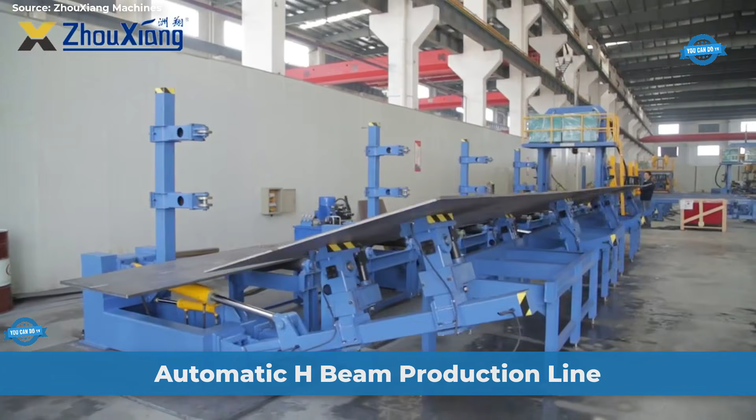The automatic H-beam production line is designed to optimize the manufacturing process of heavy steel structures, particularly focusing on H-shaped steel beams. By minimizing reliance on manual labor and traveling cranes, this production line maximizes efficiency and throughput. The process begins with cutting and laying off the raw materials to required specifications, ensuring precision and uniformity in size. Components are then assembled into T-beams, integral parts of the H-shaped steel structure.

Hydraulic mechanisms are employed to flip the assembled T-beams by 180 degrees, facilitating subsequent steps in the production process. The T-beams are then arranged and welded together to form the characteristic H-shape, the primary product of the production line. Another hydraulic overturning maneuver repositions the H-beam, preparing it for further processing. Automated shifting mechanisms transport the H-beam to the next station in the production line, ensuring a smooth flow of work.

Sequential welding of multiple seams ensures structural integrity and strength of the H-beam. Controlled by a chain mechanism, the H-beam is rotated at specific angles to facilitate welding and manipulation during the production process. Roller systems are utilized to feed the H-beam into position for various operations, ensuring precise alignment and movement. Hydraulic systems are employed to straighten any deformities or imperfections in the welded plates, ensuring quality and compliance with specifications.

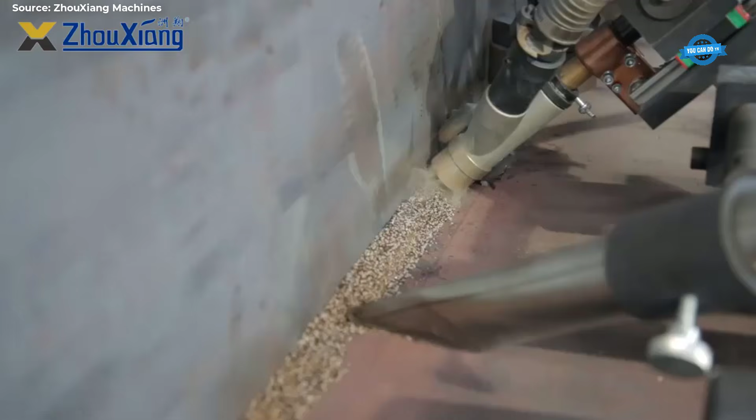Finally, the finished H-beam is conveyed out of the production line, ready for further processing or assembly into larger structures. Throughout the entire process, automation plays a key role, reducing the need for manual intervention and enhancing efficiency. Conveyor rollers, hydraulic mechanisms, and chain systems work in harmony to transport, manipulate, and assemble the steel components, resulting in a streamlined and optimized production line for H-shaped steel structures.

The TDRi aluminum boat welding system is a highly efficient and precise automated welding solution designed specifically for aluminum boat manufacturing. Here's how it works.

Offline programming: the system utilizes Robotic's offline programming software, allowing the welding program to be prepared in advance. This minimizes downtime in the welding cell when switching between products. The offline programming saves valuable time for the customer and enhances production efficiency by up to 50% compared to manual welding setups.

Seam finding and following: integrated with a seam finding and following camera system, the system accurately locates and follows the seam of the aluminum boat hull. This ensures precise welding along the desired path without the need for manual adjustments.

SPN 83000 Positioner and SPG 300 HD Gantry. The system includes TDRi's own positioner and gantry, which provide optimal access and positioning for welding. This setup allows for the best possible weld positions, ensuring high-quality welds throughout the boat construction process.

Laser seam tracking: integrated with a laser seam tracking system, the welding cell compensates for any deviations in the weld path. This ensures consistent weld quality, even in cases where the material or seam may vary slightly.

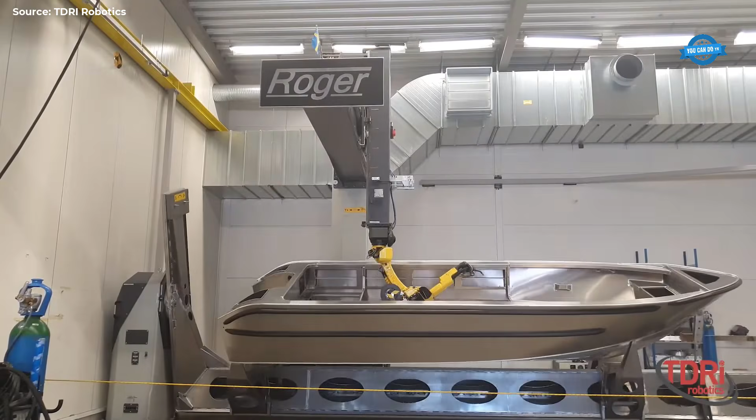SGP 300 HD Heavy-Duty Pillar Gantry. This series of pillar gantries provides robust support for the welding process, with a large payload capacity of up to 300 kilograms. It is suitable for various applications, including twin-wire welding, laser cutting, plasma cutting, and more.

Robotic heavy welding for heavy construction equipment involves employing advanced techniques and specialized equipment to ensure precise and efficient welding of various components used in construction machinery.

Intercro, a prominent player in this field, utilizes torch changing, preheating, single wire, and tandem twin welding techniques to enhance the quality and durability of products such as truck-mounted cranes, aerial working platforms, loaders, and tree transplanters.

Key to the success of robotic heavy welding is the accurate positioning of both the robot and the workpiece. Intercro employs various tools like single or multi-axis workpiece positioners, sliders, pillars, and gantry systems to achieve this precision according to industry standards. Additionally, technologies like arc, touch, and laser sensors are utilized simultaneously to ensure flawless welding applications and achieve precise results.

Some projects undertaken by this robotic heavy welding include welding excavator buckets, crane components, forklift parts, and various other heavy machinery components such as mobile cranes, towers, firefighting equipment, and silos for fuels and chemicals.

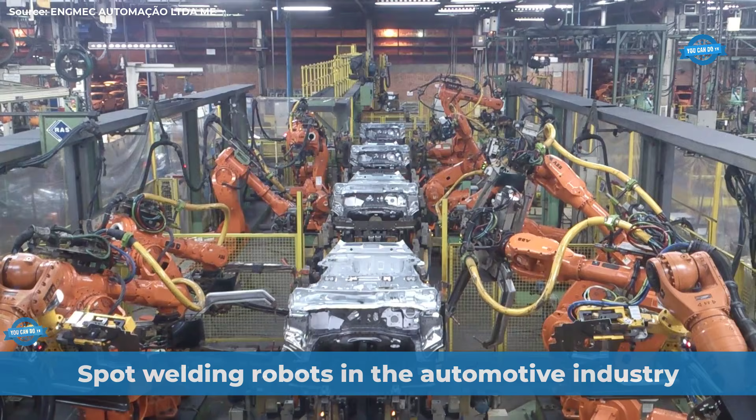Spot welding robots in the automotive industry are integral for joining metal components quickly and precisely. These robots are equipped with specialized arms that hold electrodes, which deliver an electrical current to create a weld. The process involves the robot positioning the electrodes precisely over the metal pieces to be joined, applying pressure, and then delivering a burst of electricity to create the weld.

To ensure accuracy, spot welding robots often utilize advanced sensors and vision systems to detect the exact location of the weld points and adjust accordingly. Additionally, they can be programmed to perform a variety of welds on different types of metal, making them versatile for various manufacturing needs.

Welding stands as a cornerstone process in numerous manufacturing sectors, from automotive to aerospace, construction to shipbuilding. However, despite its critical role, traditional welding methods often entail significant time investments and labor-intensive workflows. This inefficiency can bottleneck production timelines and inflate operational costs.

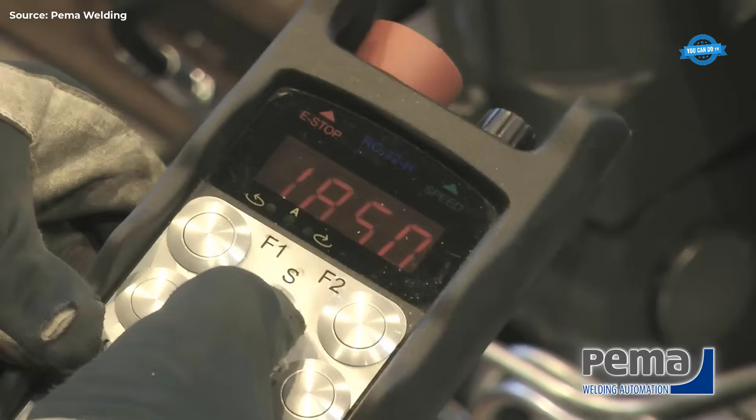Enter welding automation, a paradigm shift that promises to revolutionize the landscape of manufacturing efficiency. At its core, welding automation entails the integration of advanced technologies to mechanize various aspects of the welding process. This can encompass a spectrum of solutions, ranging from sophisticated robotic welding systems to purpose-built automated welding cells. The overarching goal? To streamline operations, enhance productivity, elevate weld quality, and curtail labor expenses.

Consider the versatility offered by robotic welding systems. These robotic arms, equipped with welding torches and sensors, possess the agility to execute a myriad of welding tasks with pinpoint accuracy. Their programmable nature allows for precise control over welding parameters, ensuring consistency across batches and minimizing the likelihood of defects. Meanwhile, automated welding cells are tailored to specific welding applications, optimizing efficiency and throughput for designated tasks.

Enterprises seeking to harness the power of welding automation often turn to seasoned experts like Pema. With over 5 decades of experience in designing and manufacturing welding automation solutions, Pema stands at the vanguard of innovation in the field. Their offerings span a comprehensive array of options, ranging from standalone equipment to fully integrated production lines. Each solution is meticulously crafted to uphold stringent safety standards, enhance ergonomic comfort, and deliver unparalleled productivity.

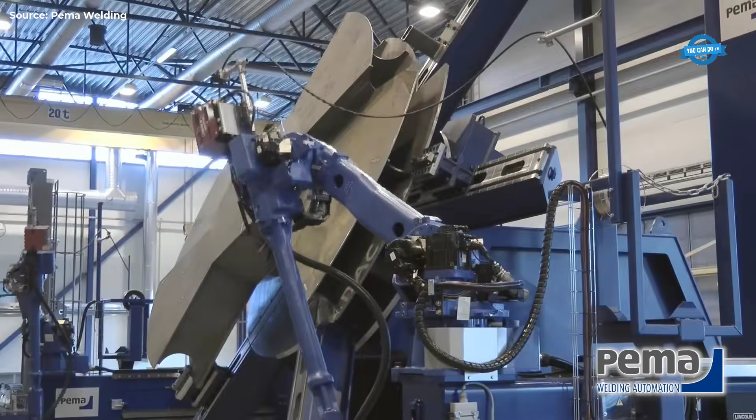The benefits of welding automation extend far beyond mere operational efficiency. By entrusting welding tasks to automated systems, businesses mitigate the risks associated with human error, thereby safeguarding weld quality and minimizing rework. The resultant uptick in productivity translates to accelerated throughput and reduced time to market, a boon for companies operating in competitive markets. Furthermore, by alleviating workers from repetitive or hazardous welding tasks, automation plays a pivotal role in bolstering workplace safety.

However, the journey towards welding automation is not without its challenges. Implementing automated solutions necessitates careful planning, strategic investment, and comprehensive training programs. Pema recognizes these hurdles and offers turnkey solutions that encompass everything from initial consultation and system design to installation, commissioning, and employee training. Their team of automation experts collaborates closely with clients, ensuring a seamless transition to automated workflows and maximizing return on investment.

The evolution of welding automation often unfolds in incremental steps. For many companies, the initial investment may entail automated welding positioners, a fundamental building block that lays the groundwork for future advancements. As operations expand and demand grows, businesses may progressively incorporate more sophisticated solutions, such as column and boom manipulators, roller beds, and fully programmable robotic welding stations. The integration of advanced software facilitates offline programming, system-wide integration, and real-time monitoring, further enhancing operational efficiency and control.

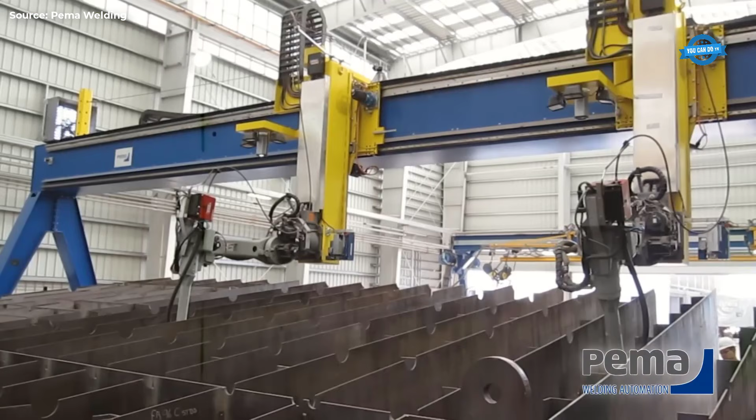Embarking on the path to welding automation necessitates a collaborative effort involving management, frontline workers, and automation specialists. Every aspect of the process, from workflow optimization to equipment selection, is meticulously scrutinized to align with organizational objectives and operational requirements. With Pema as a trusted partner, companies can navigate this journey with confidence, knowing that their transition to welding automation is not just an evolution, but a transformation that will shape the future of their operations.

Welding trailer chassis involves a meticulous process that ensures structural integrity and durability, crucial for the safety and performance of trailers on the road. Valk Welding's arc welding robot solution for Turbos Hoet in Belgium exemplifies a sophisticated approach to this task.

The centerpiece of this welding setup is the Panasonic welding robot, strategically placed on a gantry system spanning a 16-meter track. This configuration allows for precise movement and coverage across the trailer chassis, ensuring consistent weld quality throughout the assembly process.

Programming plays a vital role in orchestrating the robot's movements and welding sequences. Valk Welding utilizes DTPS offline programming software, enabling engineers to meticulously plan and simulate welding operations before implementation. This approach minimizes downtime and maximizes efficiency during actual production runs.

The implementation of the automated welding line at Turbos Hoet was not without its challenges. Selecting the right supplier was critical, considering factors such as spatial constraints, service availability, and experience in handling large-scale projects. Valk Welding emerged as the ideal partner, offering a comprehensive solution tailored to the specific needs of the project.

The benefits of this automated welding solution extend beyond efficiency gains. By eliminating manual welding processes, the risk of human error is significantly reduced, resulting in consistently high-quality welds. This not only enhances the structural integrity of the trailer chassis but also contributes to overall safety on the road.

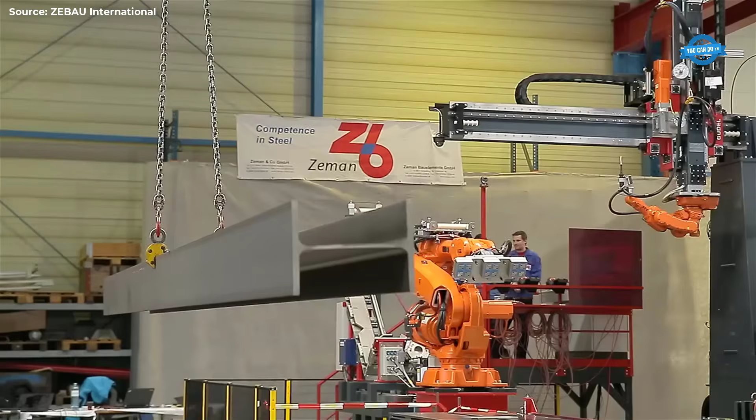Loading of beam. Simultaneously, the main profile or beam onto which the add parts will be assembled is loaded into the machine. This main profile can be a welded beam or a SIN beam, as well as rectangular or square tubes.

Assembly. The machine's tack and weld robot then takes over for fully automated and precise beam assembly. Add parts are accurately positioned onto the main profile, preparing them for welding.

Auto tool change. As the assembly progresses, the machine automatically changes tools as needed, ensuring a smooth workflow without manual intervention.

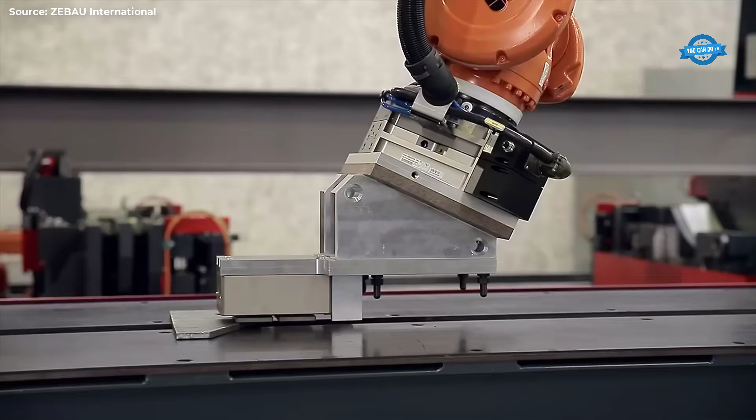Auto turning of add parts. An integrated profile turning device allows for the full 360 degrees rotation of beams, enabling maximum processing efficiency and continuous automated production. This feature ensures that all sides of the beam are accessible for assembly and welding.

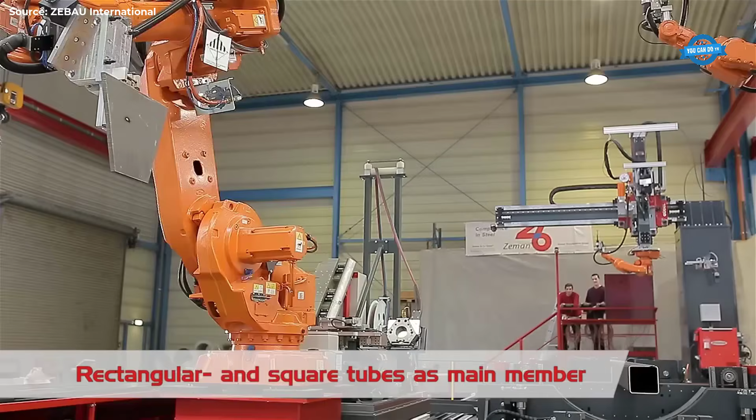Welded beams and SIN beams as main member. The welding process utilizes mag welding technology for both fillet and groove welds, ensuring strong and durable connections between the add parts and the main profile.

Weld out. After assembly, the welded beams undergo further processes such as preheating to ensure optimal welding conditions, and the automatic cleaning and recalibration of welding torches to maintain quality and consistency.

Easy integration. The SBA Compact is designed for easy integration into existing workflows, allowing it to seamlessly become part of your production process. Its modular design also allows for future upgrades to further enhance productivity.

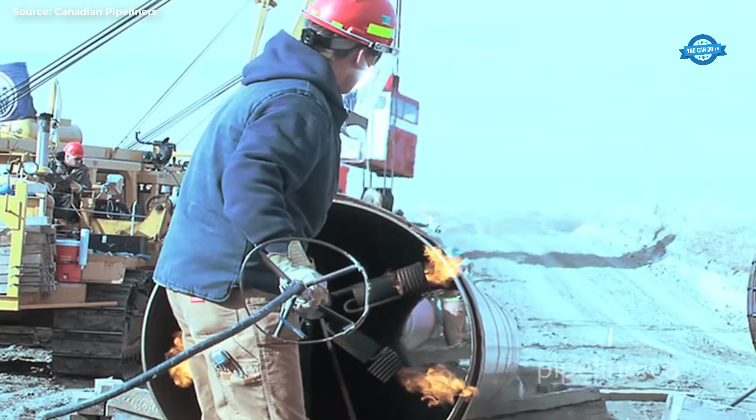At the heart of pipeline construction are skilled pipeline journeymen and welders who employ a range of welding methods to join individual pipe sections. The choice of welding process depends on various factors, including the diameter of the pipe, the terrain, and project specifications. While manual welding methods require a high level of craftsmanship and attention to detail, automatic welding technologies have revolutionized large diameter pipeline construction, enhancing efficiency and consistency.

Before welding can commence, meticulous preparation is required. Crews meticulously position and align individual pipes, ensuring they meet strict specifications and tolerances. In areas where laying a straight pipe is not feasible due to the terrain's contours, journeyman pipe layers, often referred to as stabbers, utilize specialized bending machines to shape the pipes accordingly.

This process requires a keen understanding of geometry and material properties to achieve precise bends that align with the land's natural contours.

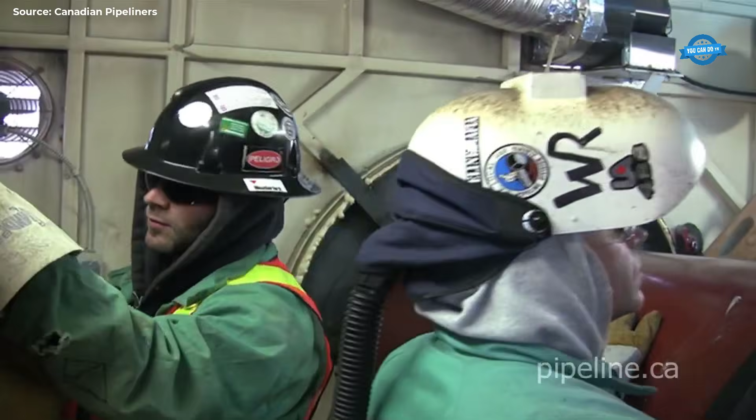Once the pipes are properly aligned, they undergo preheating to a specified temperature range to prepare them for welding. Preheating is essential for ensuring the proper fusion of the weld and minimizing the risk of defects such as cracking or distortion.

The welding process itself involves multiple passes, each serving a specific purpose in ensuring the integrity of the weld joint. Beginning with a bead weld, welders work meticulously to deposit filler material along the joint, gradually building up layers to form a strong bond between the pipe sections.

Throughout the welding process, welders maintain strict quality control measures, carefully monitoring parameters such as heat input, travel speed, and weld bead profile to ensure consistency and adherence to industry standards.

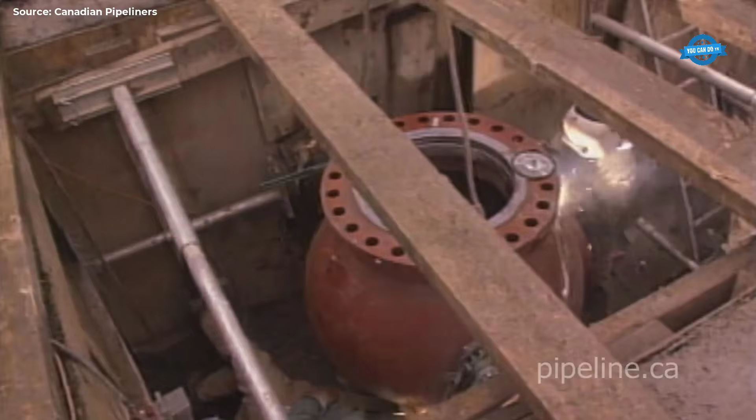In addition to manual welding methods, some pipelines employ advanced automatic welding technologies. These systems utilize robotic welding equipment controlled remotely by skilled operators. Automatic welding offers advantages in terms of speed, consistency, and quality, particularly in large-scale pipeline projects where efficiency is paramount.

Beyond welding, pipelaying encompasses a range of tasks, including the installation of pipeline supports, tie-ins, and testing. Tie-ins, in particular, involve connecting finished pipeline sections to existing infrastructure, requiring precise alignment and welding techniques to ensure a seamless transition between segments.

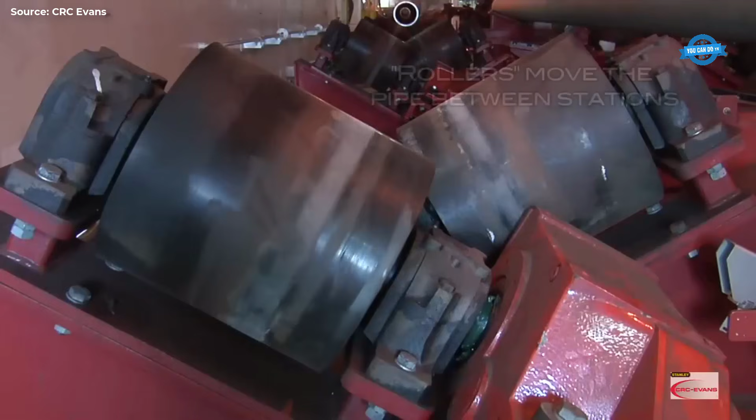The P600 will be operated onboard Helix ESG's pipelaying vessel Caesar. The process begins in the ship's massive pipe hold. Crane operators load pipe onto the rollers. Rollers move the pipe between stations.

The pipe is rollered onto the pipe elevator. The pipe arrives on the production deck and is rolled into the pipe facing station.

The pipe ends are beveled for mechanized welding. The pipe is positioned for the pipe-facing machine, or PFM.

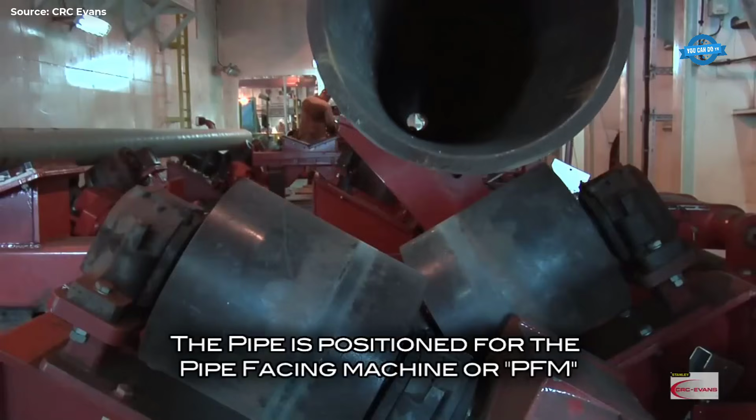The PFM is inserted into the pipe. The operator engages the faceplate.

When the bevel is finished, the PFM is removed from the pipe end. The pipe ends are now beveled and ready to be welded.

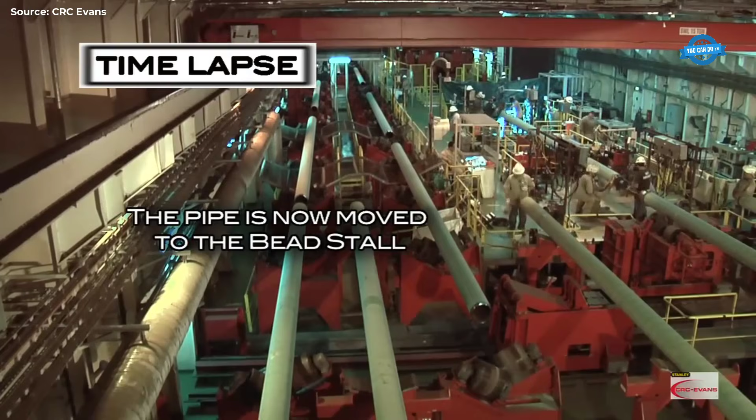The pipe is now moved to the bead stall. Before the pipe can be welded, it must be preheated, so it is moved into the preheat area.

The band is put on the pipe and adjusted to a predetermined distance. The pipe is heated to the qualified temperature to evaporate all moisture from the surface.

After preheat, the pipe is moved to the firing line. The reach rod is inserted into the next piece of pipe.

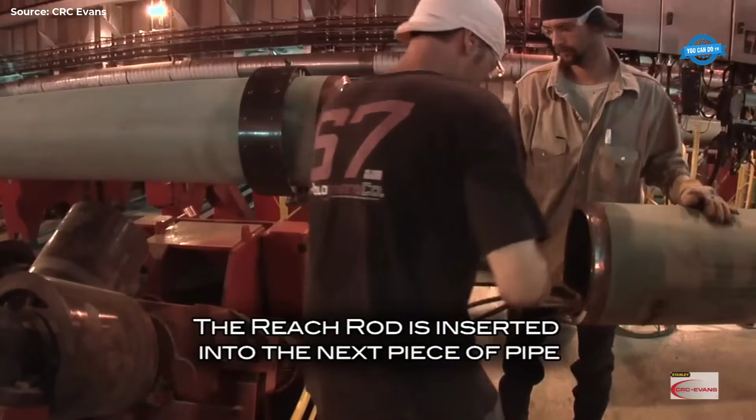The clamp is aligned and the spacer signals for the next piece of pipe. When the pipe ends are aligned, the spacer taps the pipe.

The reach rod operator raises the clamp's shoes and clamps the bevel in place. Helpers place the P600s on the pipe band.

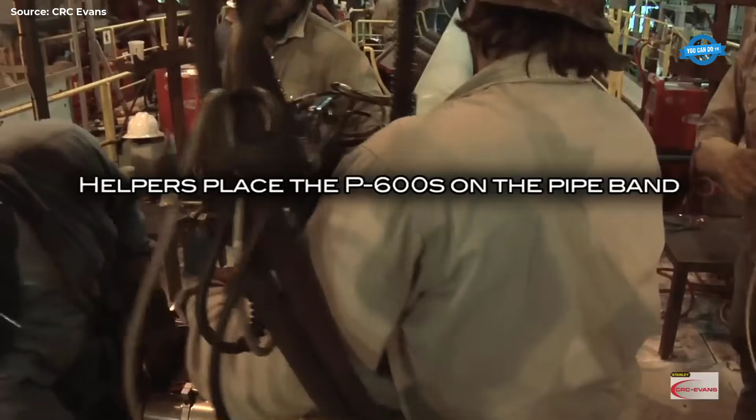The welder deposits the root and hot passes. The second weld station fills out and caps the pipe.

The finished weld is tested with X-rays. Film is wrapped around the weld.

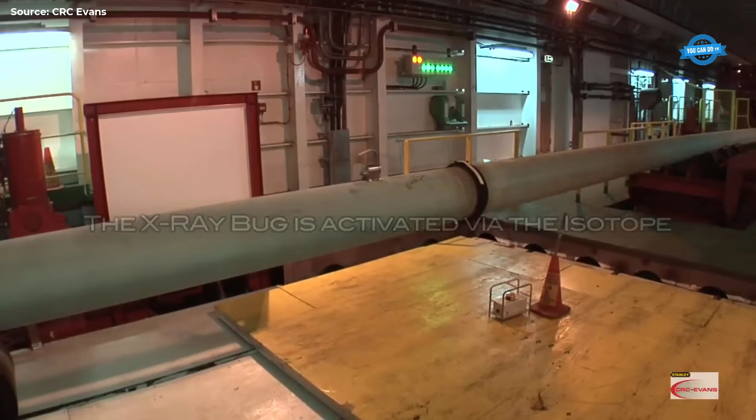The X-ray bug is activated via the isotope and emits X-ray for 15 seconds.

The journey from raw materials to steel is a global endeavor. These raw materials are transported by ship and rail, converging at the production hub.

The transformation begins with the processing of iron ore into concentrated iron ore pellets. These small spheres are convenient for transport, storage, and processing.

Within the sprawling steel production facility, several towering blast furnaces, some as tall as 15-story buildings, work tirelessly, churning out up to 14,000 tons of pig iron daily.

The process commences as coke and ore are conveyed to the blast furnace, alternating layers by means of a rotary chute. As the layers descend, rising process gas, generated by preheated air at 1,200 degrees Celsius, initiates the reduction and melting of iron ore.

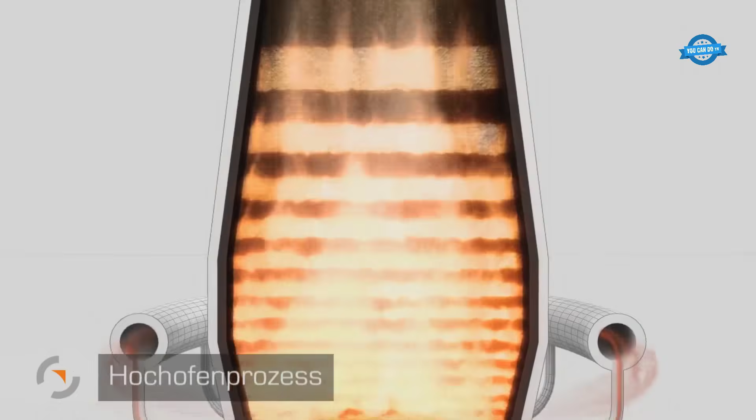This arduous process, taking 8 hours, culminates in liquid iron and slag in the lower part of the furnace, with periodic tapping every 2 hours.

At around 1,450 degrees Celsius, the pig iron and slag are forcibly discharged through the tap hole and immediately separated. Samples are taken to assess quality, a task performed by professionals donned in protective gear.

Below, torpedo ladle cars, named for their elongated shape, await their payload. The scale of the steel mill at Salzgitter Flachstahl is awe-inspiring, spanning over 400 meters in length, a space vast enough to accommodate nearly 480 detached houses.

The next phase sees pig iron poured from torpedo ladles into transport ladles, each holding approximately 200 tons.

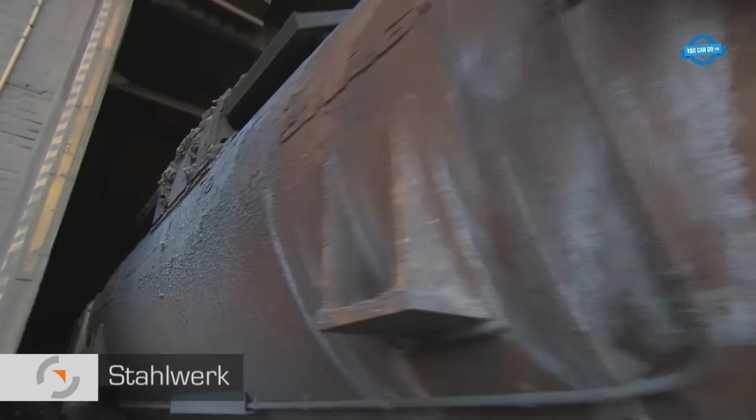Scrap is introduced into the process alongside pig iron, both converging in a converter. At Salzgitter's site, there are 3 LD converters utilizing technically pure oxygen through porous plugs and an oxygen lance.

This converter process, lasting approximately 40 minutes, transforms pig iron into crude steel, with each converter boasting a capacity of 220 tons. The site produces up to 12,500 tons of crude steel daily.

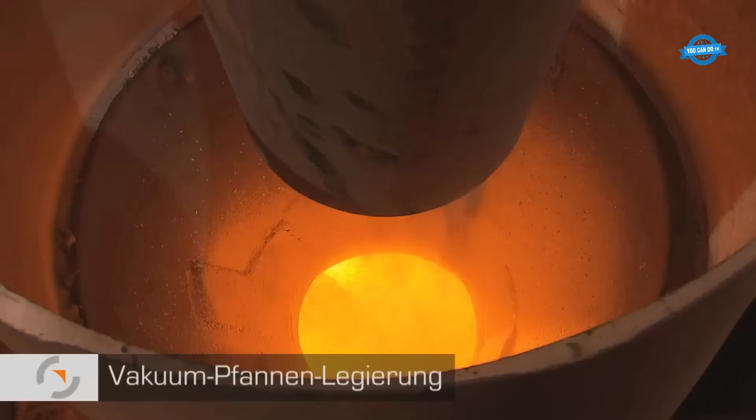Yet, steel is not a one-size-fits-all material. Depending on its intended purpose and customer requirements, alloying elements such as manganese, silicon, chromium, nickel, titanium, and molybdenum are added to the crude steel at the VPL plant to create specialized, high-grade steel.

These distinct steel grades are then directed to continuous casting lines that fashion them into slabs from the molten steel. These slabs develop a solid outer shell while the core remains molten.

The slabs are subsequently torch cut into manageable pieces for shipment. These slabs, some as thick as 35 centimeters and weighing up to 32 tons.

The hot rolling process is responsible for transforming steel slabs into a wide range of products, including sheets, plates, and structural components. It involves a series of precisely controlled steps that impart strength, shape, and desirable properties to the steel.

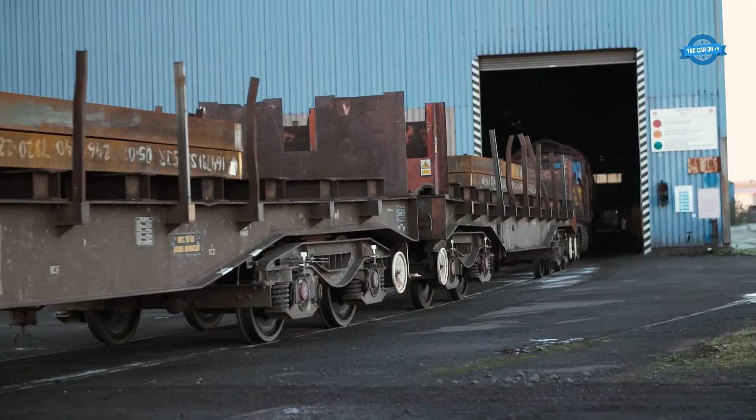Heating. The process begins with heating steel slabs to extremely high temperatures, often exceeding 1,200 degrees Celsius. This intense heat softens the steel and makes it more malleable, preparing it for deformation.

Rolling. The heated slabs are then fed through a series of rollers within the hot rolling mill. These rollers gradually reduce the thickness of the steel while also shaping it according to the desired specifications. As the steel passes through the rollers, it undergoes significant mechanical pressure, which refines its grain structure and enhances its strength.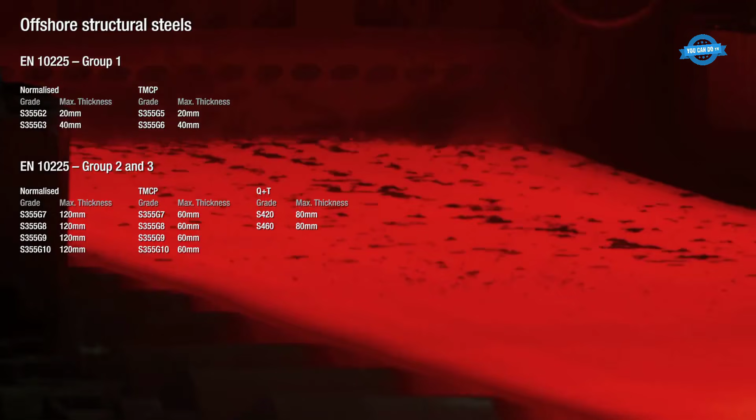Experienced operators oversee the entire process, ensuring precise control over temperature, pressure, and rolling speed. Modern technology, including data networks and automation, plays a crucial role in monitoring and optimizing the mill's performance, ensuring consistency and efficiency.

Walter Tosto Spa, located in Italy, has established itself as a global leader in the manufacturing of high-pressure equipment and vessels, with a strong reputation for quality and precision.

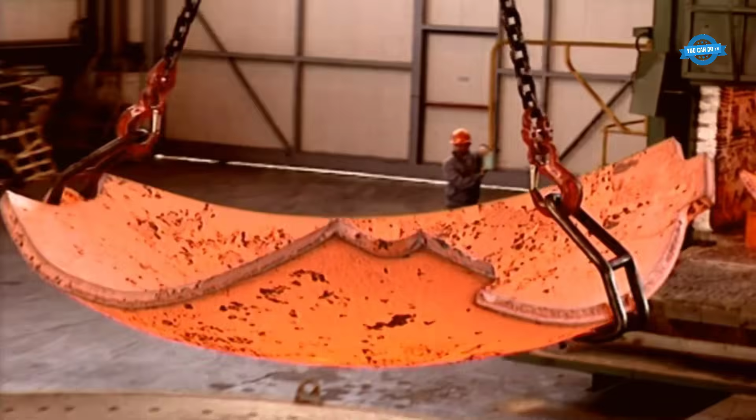One of the key assets in their production process is a state-of-the-art robotic welding system. This system boasts an impressive ability to coordinate 8 axes simultaneously, ensuring unparalleled precision with a repeatability of 0.1 millimeters. The robot's load-bearing structure is ingeniously designed to minimize bending, even at maximum extension, ensuring the highest quality welds. Its large work area allows for flexible arrangements of pieces, facilitating circular welding around the beam.

Additionally, the facility features a Correa Versa gantry milling machine, equipped with 5 axes. This advanced machine can handle pieces up to 10.5 meters in length, 1.65 meters in height, and 6.8 meters in width, all while maintaining exceptionally tight tolerances.

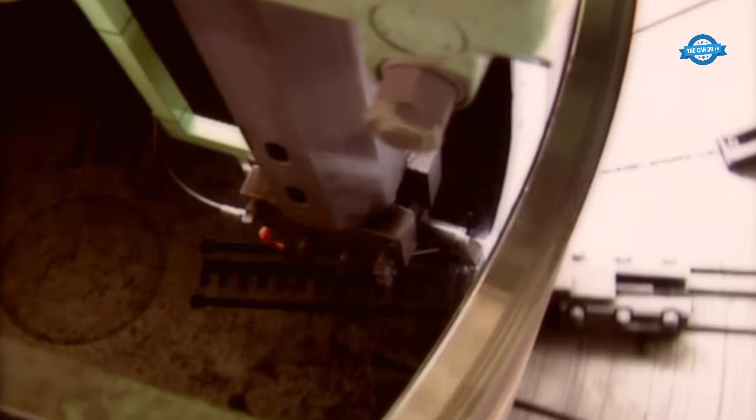Furthermore, the company has invested in 5 furnaces for heat treatment operations, each tailored for different sizes, temperatures, and thermocouple needs. With an extensive machine park and cutting-edge technologies, the facility has the capability to conduct all critical activities in-house, ensuring that every high-pressure equipment and vessel they manufacture meets the highest standards of quality and reliability.

At Goodwin Steel Castings, the production process of a steel casting begins with the meticulous creation of the casting mold. This step is absolutely critical, as it defines the final shape and characteristics of the steel casting. The foundry's skilled craftsmen excel at crafting molds tailored to exacting specifications, accommodating a wide range of applications. The company's expertise extends to handling high alloy and nickel alloys, allowing them to meet specialized requirements within industries like power generation.

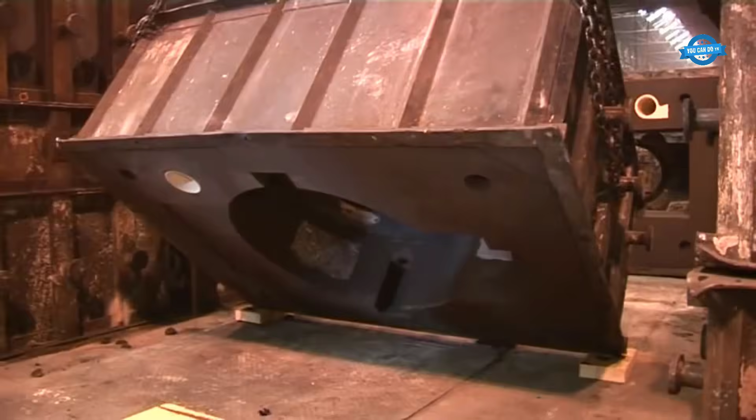Following mold preparation, the foundry experts move on to the melting process, a stage where precision is paramount. Their distinction lies in its ability to work with a diverse array of alloys, including the historic achievement of producing the world's first MAR-BN 9% Cr steel casting for advanced ultra-supercritical power generation. During this phase, strict control over alloy composition and temperature is maintained to ensure the desired material properties are achieved.

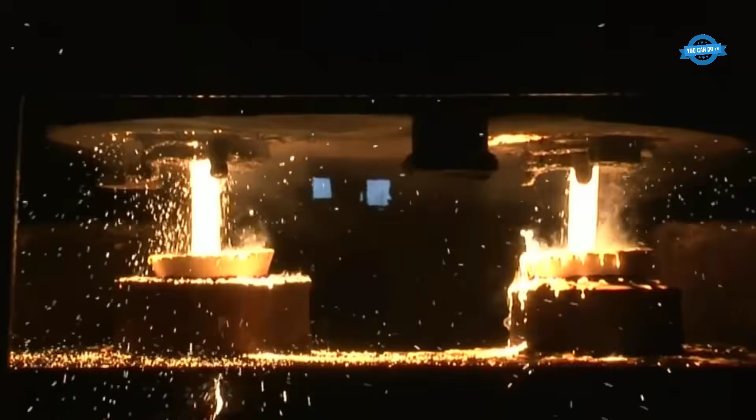The company's groundbreaking research and development efforts have yielded remarkable advancements in steel alloys. For instance, the development of the G130 grade has expanded the possibilities for heavy section castings, particularly in applications where turbines operate above 700 degrees Celsius. This innovation has extended the section size limitations of super duplex stainless steel castings while simultaneously enhancing corrosion and impact resistance, making it an ideal material choice for a broad spectrum of applications.

The company's machine shop represents the pinnacle of advanced manufacturing, featuring state-of-the-art CNC machining and inspection facilities. These CNC machines aren't just tools. They are precision instruments used to refine and shape castings to exacting standards. The intricate and precise machining carried out at the machine shop is essential to meet the stringent requirements of industries such as power generation.

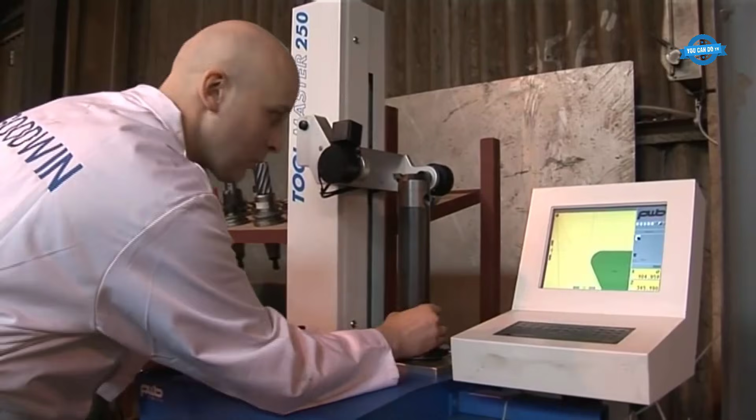The welding stage plays a crucial role in enhancing the strength and durability of castings, especially in applications subjected to high levels of stress. This machine shop offers a diverse range of welding processes, including robotic overlay welding of hard facings and nickel-based cladding. These processes contribute to the resilience and longevity of the castings. Furthermore, the machine shop employs various welding methods such as GMAW, FCAW, and SAW for both manual and robotic welding, ensuring flexibility and adaptability to meet diverse customer needs.

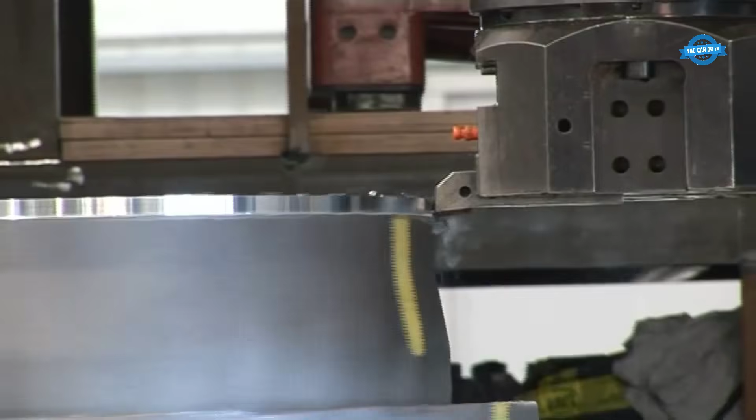Quality control is a paramount concern here. Rigorous testing procedures are conducted to ensure that the castings meet and exceed the required standards. The company employs both destructive and non-destructive testing methods to scrutinize properties such as corrosion resistance, impact resistance, and structural integrity. Cutting-edge equipment like scanning electron microscopes equipped with spectrographic EDX are employed for in-depth metallurgical analysis, ensuring that the highest quality is maintained throughout the manufacturing process.

Goodwin's capabilities extend to assembling complex product assemblies, some weighing up to an astounding 100,000 kilograms. This final step showcases the company's unparalleled ability to handle massive and intricately designed components, delivering end-to-end solutions to its customers.

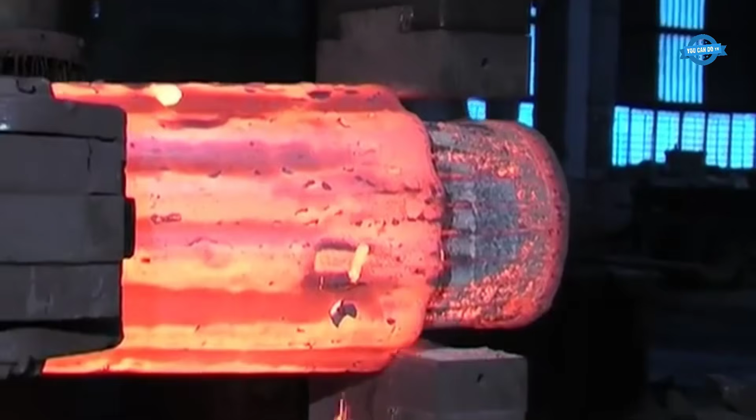The forging process for large long shaft forgings is a critical aspect of heavy equipment manufacturing, as these forgings serve as core components in machinery and equipment. The quality and performance of these forgings are of utmost importance due to the heavy loads and complex operations they endure. To meet these stringent requirements, the free forging process has been developed and optimized to reduce production costs, energy consumption, and improve forming quality.

Large long shaft forgings play a pivotal role in heavy equipment manufacturing, serving as transmission shafts and key components. Given their critical role, these forgings must meet extremely high quality standards. The production process involves several stages, including pre-forging heating, the forging process itself, and post-forging heat treatment. Due to the complexity of production, various factors come into play, necessitating the development of a rational free forging process to ensure the safe heating of the ingot, reduce heating time, save energy, and meet the necessary heat treatment requirements.

The significance of large long shaft forgings lies in their installation in critical parts of machinery and their exposure to heavy loads. Consequently, these forgings must be free from defects such as porosity, segregation, and inclusions to achieve the required performance. As these forgings are typically made from ingots, which inherently contain metallurgical defects, addressing these defects becomes essential. This involves eliminating the metallurgical defects of the ingot itself, achieving a uniform fine grain structure, and ensuring a quantitative distribution of mechanical properties in the forging. The quality of these forgings not only drives industrial development but also ensures the safety of equipment operators.

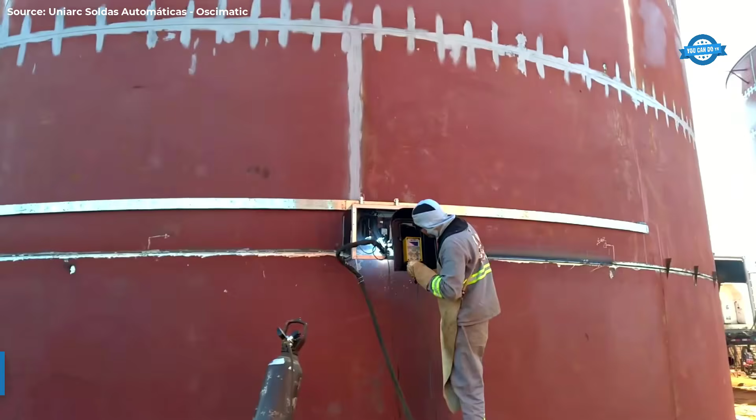The automatic welder revolutionizes storage tank welding with its versatile functionality and advanced features. Designed for horizontal welding outside the tank, it boasts magnetic fixation, allowing it to securely adhere to surfaces in all positions. Equipped to handle MIG-MAG, tubular wire, and TIG processes, the Oscimatic ensures adaptability to diverse welding requirements. Its key benefits include heightened productivity through increased welding speed and material deposition, enabling continuous operation with minimal interruptions.

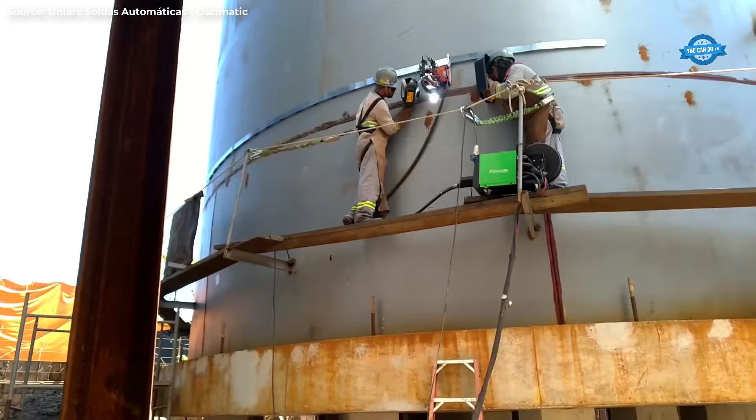Moreover, the automatic welder prioritizes quality, offering precise control over welding process variables and execution parameters. This results in a significant reduction in rework, enhancing overall efficiency and product integrity. Safety is paramount with the Oscimatic, ensuring absolute operational safety for welders. Its ergonomic design promotes comfortable body positioning away from critical welding zones, enhancing user comfort and reducing fatigue.

Pipeline welding is a critical aspect of constructing and maintaining the vast network of pipelines that transport fluids or gases over long distances. Whether it's for oil, natural gas, water, or other substances, ensuring the integrity and longevity of pipelines is paramount for safety, efficiency, and environmental protection.

Understanding the properties of the materials being welded is essential. Pipelines may be constructed from various materials such as carbon steel, stainless steel, or alloy metals, each with its own welding requirements and challenges. It's crucial to ensure that the materials meet the specifications outlined in the welding procedure and adhere to industry standards and regulations.

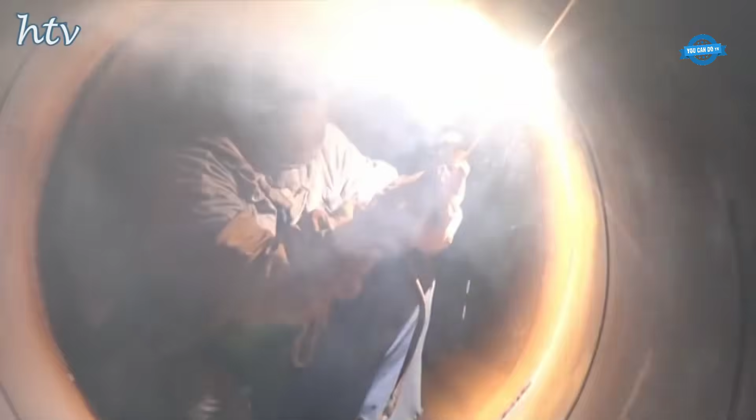High-quality welding equipment and consumables suitable for pipeline welding applications should be used. Welding machines must be calibrated and maintained regularly to guarantee consistent performance. Appropriate welding consumables, such as electrodes or filler wires, should be selected based on the material being welded and the welding process employed, e.g., shielded metal arc welding, gas tungsten arc welding.

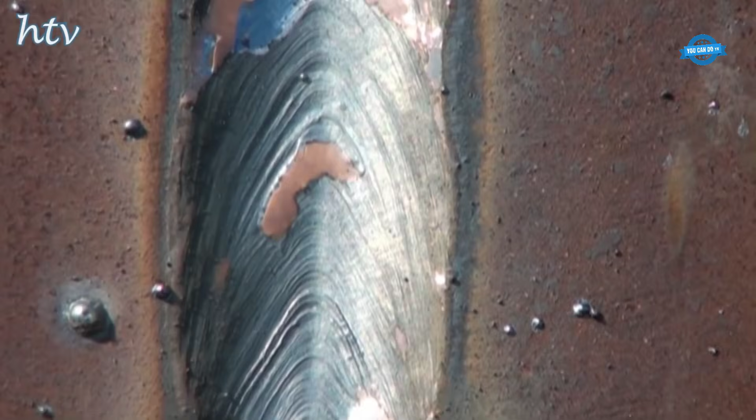Thoroughly cleaning and preparing the welding area, including the pipe surfaces and joint interfaces, is crucial to remove contaminants such as rust, oil, dirt, and moisture. Proper fit-up and alignment of the pipes should be verified to minimize welding defects and distortion. Measures to prevent heat-affected zone, HAZ, contamination, such as purging inert gas into the pipe interior during welding, should be implemented.

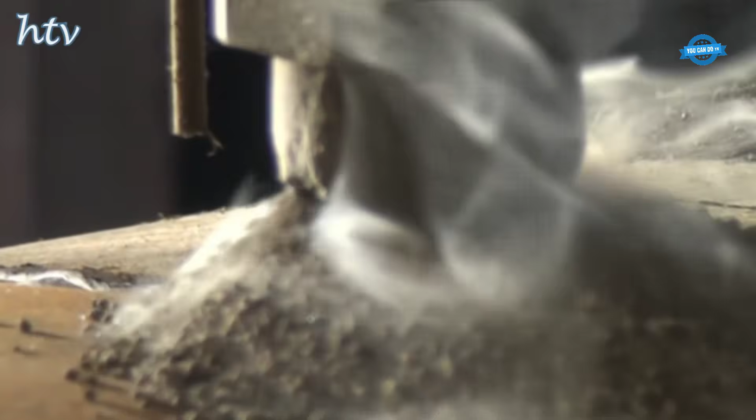Welding techniques that ensure proper penetration, fusion, and deposition of weld metal while minimizing defects such as porosity, lack of fusion, and undercutting should be employed. Maintaining appropriate arc length, travel speed, and electrode angle throughout the welding process is essential to achieve uniform and sound welds. Welding parameters should be adjusted based on the joint configuration, material thickness, and welding position to optimize weld quality.

Implementing post-weld heat treatment, PWHT, if required to relieve residual stresses and enhance the mechanical properties of the weldment is essential. Visual and non-destructive testing, NDT, inspections, such as radiographic testing, RT, or ultrasonic testing, UT, should be performed to evaluate weld quality and detect any defects or discontinuities. Surface cleaning and finishing operations should be conducted to remove weld spatter, slag, and any other surface imperfections.

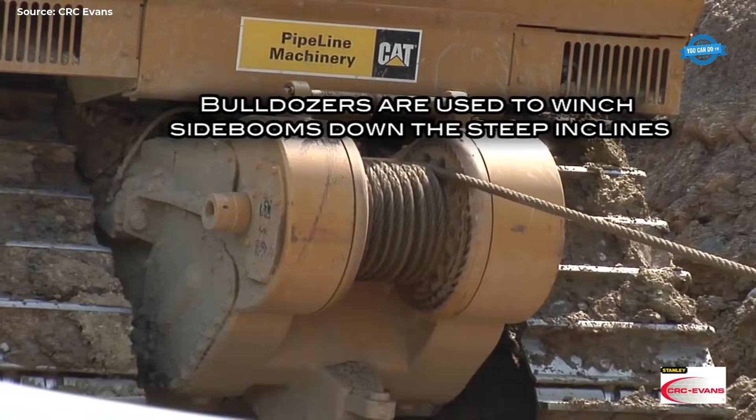Adhering to safety protocols and procedures to protect personnel, equipment, and the environment during welding operations is crucial. Mitigating potential hazards such as fire, explosion, and toxic fumes by implementing appropriate ventilation, fire prevention measures, and personal protective equipment, PPE, is imperative. Considering environmental factors such as temperature, humidity, wind, and altitude, which can affect welding performance and weld quality, is also important.

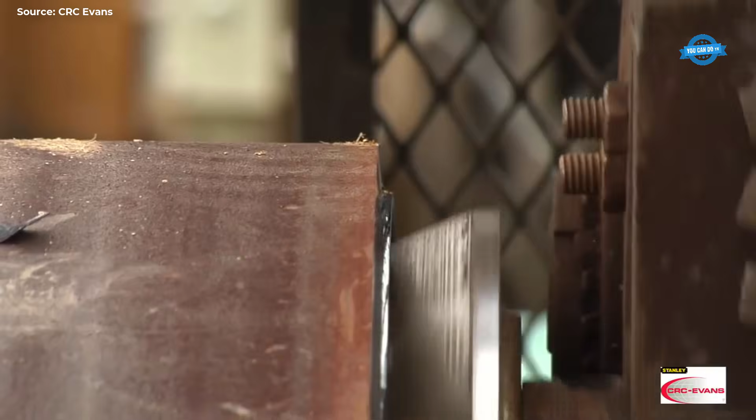Maintaining accurate records of welding activities, including WPS documents, welder qualifications, inspection reports, and material certifications, is essential. Ensuring traceability of materials and welding consumables to verify compliance with specifications and regulatory requirements is crucial. Facilitating comprehensive documentation for auditing purposes and future reference during pipeline maintenance and integrity assessments is imperative.

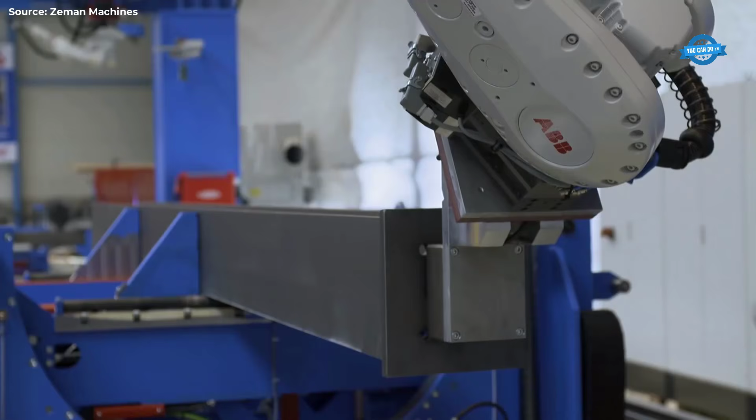Power and precision. Imagine a single worker overseeing the SBA Conti line, orchestrating a symphony of automated processes that churn out steel beams with remarkable efficiency. In an 8-hour shift, this machine can process an impressive 13 beams, a feat that surpassed even the lofty expectations of a customer in Japan.

Design. Customization lies at the heart of the SBA Conti line. Each unit is meticulously tailored to the specific needs of the manufacturer, ensuring seamless integration into existing workflows. From in-feed systems with automatic beam straightening to built-in features designed to handle the toughest jobs, this machine dares fabricators to challenge its capabilities.

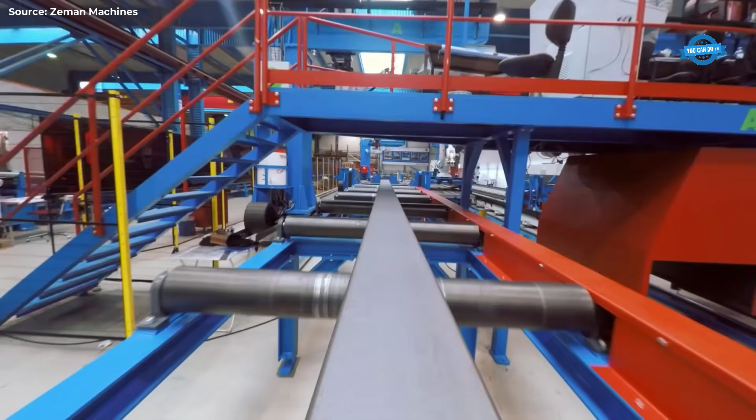Crafted with precision in Austria, the SBA Conti boasts outstanding attention to detail. Its design accommodates various plant setups, catering to facilities with continuous material flow and high output demands for welded structural steel. Whether you opt for the standard SBA Conti or the enhanced SBA Conti Plus with additional welding robots, rest assured that every component is engineered for maximum efficiency and reliability.

Investment and reward. Investing in a steel beam assembler promises rapid returns. Beyond the financial benefits, the SBA Conti prioritizes worker safety, reducing downtime associated with injuries on the job. Automation not only accelerates production but also enhances accuracy, mitigating the risk of errors that lead to delays and injuries. With machines that never tire, manufacturers can confidently meet deadlines and boost profitability.

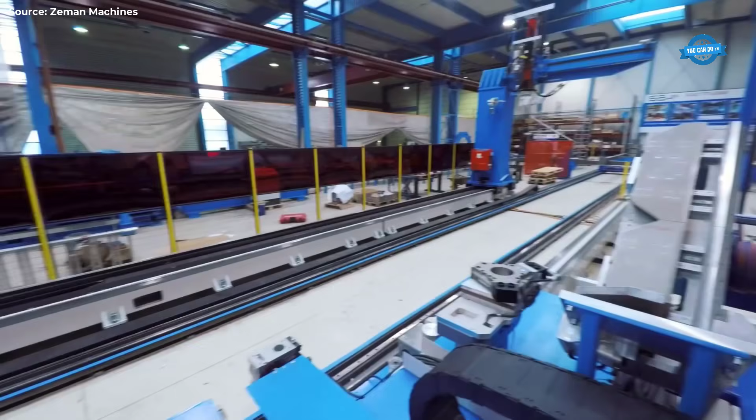ProFit Software facilitates semi-automated generation of assembly and welding workflows, optimizing efficiency and reducing human error.

The advent of fully automated tacking and welding of steel beams marks a significant milestone in the structural steel fabrication industry. Robotic welding, assembly, and fabrication have long been seen as the future, promising increased efficiency, precision, and cost-effectiveness. Now, with innovations like Zeman's SBA steel beam assembly technology, this future has become a reality, transforming the conventional steel fabrication market.

The SBA technology represents a true game changer in steel fabrication, addressing past challenges and hurdles unique to the industry.

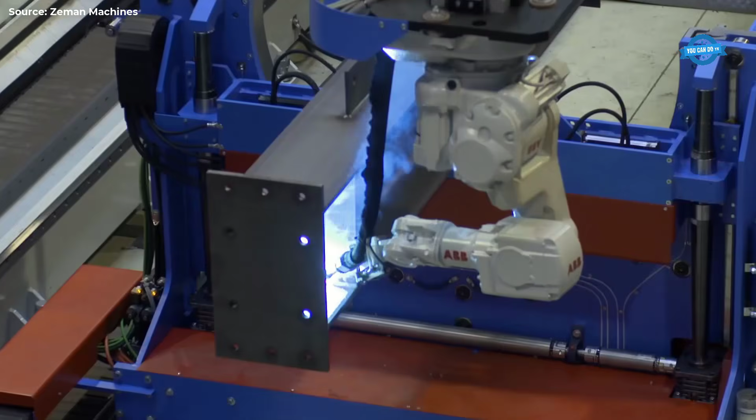There is a range of robotic assembling and welding lines, each designed to optimize production capacity and efficiency. These systems boast impressive features, such as the ability to assemble add-on parts in less than 1.5 minutes per part, regardless of weight. The integration of ProFit software enables seamless 3D data flow to the robots, eliminating the need for programming or robot teaching.

Comparative efficiency measures highlight the superiority of robotic welding over manual methods, with arc-on time reaching 65% for robotic welding systems compared to 20 to 25% for manual welding.

The SBA modular concepts are designed to accommodate various client requirements, including floor space limitations, existing material flow considerations, production capacity goals, and budget constraints. These modular systems offer flexibility, allowing for easy setup, extensions, and upgrades to meet evolving production needs.

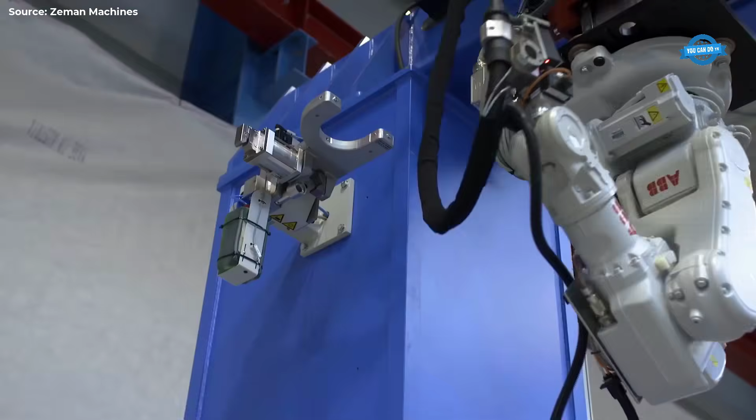The radial-axial ring rolling machine is a remarkable piece of industrial equipment known for its precision and efficiency in producing seamless rings of various sizes and materials. Let's delve into how this machine operates and why it is highly regarded in the manufacturing world.

The process begins with the production of a ring blank. Specialized presses are used to create these blanks, typically from cylindrical or rectangular billets of metal. These blanks are initially oversized to account for the material that will be displaced during rolling.

The ring blank is heated to a specific temperature to make it more malleable. The heating process typically consumes a significant portion of the energy used in ring rolling.

Once heated to the right temperature, the blank is placed onto the radial-axial ring rolling machine. There are two primary rolling methods, radial and radial-axial. In the radial method, the blank is rotated as it's compressed between two rollers. In the radial-axial method, an additional axial force is applied to elongate the blank while it's being rolled. This elongation allows for the production of rings with a more pronounced height.

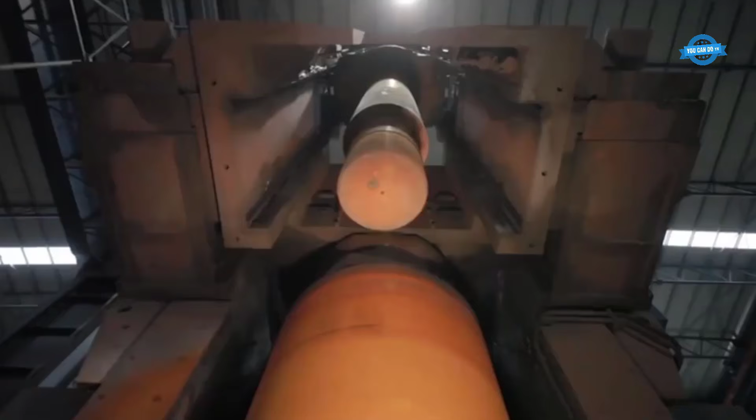Advantages of the radial-axial ring rolling machine. Energy efficiency: one of the standout features of this machine is its energy efficiency. Precise rolling, aided by sophisticated control systems, minimizes material wastage and reduces energy consumption during the heating phase. High precision: the laser measuring systems and advanced control technology ensure that the rings produced have tight tolerances and meet stringent quality standards.

Material versatility: the radial-axial ring rolling machine can work with a wide range of materials, from carbon steel to superalloys, providing manufacturers with flexibility in their production processes. Cost-effective production: the combination of energy efficiency, precise rolling, and material versatility results in cost-effective production, as it reduces the need for excessive material, machining, and energy consumption.

During the rolling process, precise measurements are crucial. Many machines are equipped with laser measuring systems that continuously monitor the outer diameter of the ring. This data feeds into a control system that adjusts the machine's parameters to ensure the final product meets the desired specifications. The rolling process shapes the blank into a ring, but it may not achieve the exact final dimensions and tolerances. Additional machining or heat treatment may be necessary to achieve the desired properties and dimensions.

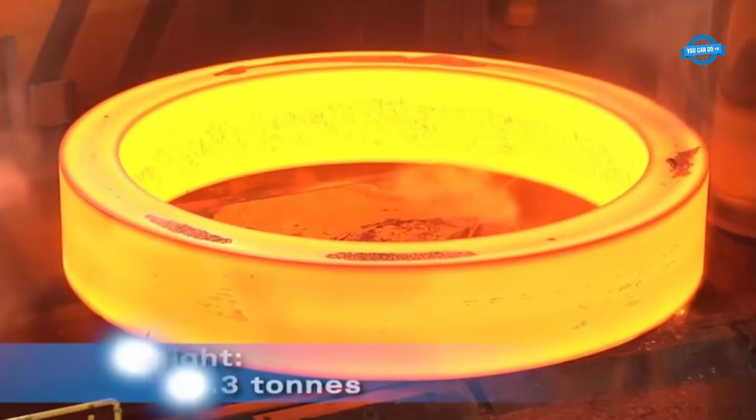HGG Group's large diameter pipe cutting machine is a specialized tool designed for the precision cutting of large diameter pipes, particularly in industries like offshore construction. This machine plays a pivotal role in ensuring the quality and accuracy of pipe-to-pipe connections and is known for its efficiency and versatility.

Cutting technology. Large diameter pipe cutting machines utilize advanced CNC, computer numerical control, technology to execute precise cuts on large pipes. They can accommodate pipes with diameters ranging from 50 millimeters (2 inches) to a substantial 8,000 millimeters (26 feet), and varying wall thicknesses, making them suitable for a wide range of applications.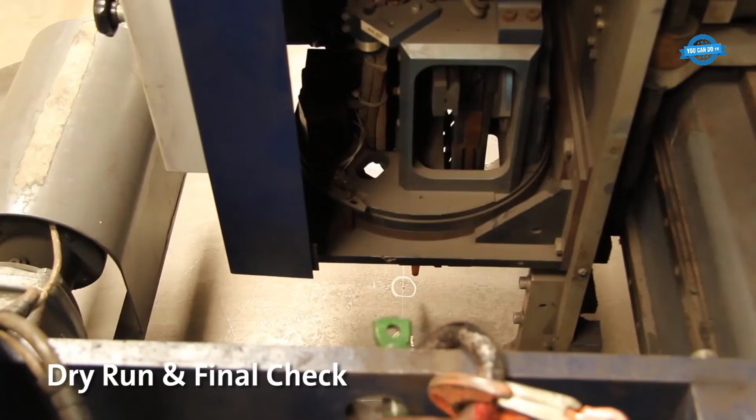Data input. To initiate the cutting process, operators input either 3D CAD files or 2D drawings of the desired pipe sections and connections. These machines are compatible with various industry standard formats, ensuring flexibility in data preparation.

Data processing. Once the data is provided, the large diameter pipe cutting machine software processes it to determine the optimal cutting path and parameters. This step involves generating NC, numerical control, data, which serves as instructions for the machine's cutting head.

Cutting precision. The cutting head of the machine is equipped with specialized cutting tools that can execute a variety of bevels, including V bevels, Y bevels, K bevels, and X bevels. These bevels are crucial for welding preparations and ensure that the pipe-to-pipe connections are made with precision and reliability.

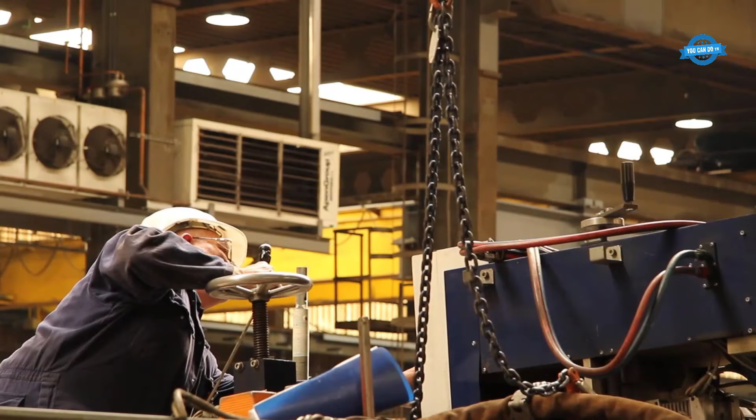Transportability. These machines are designed for transportability, making them suitable for on-site cutting. They can be easily transported to the location, eliminating the need to transport large pipes to a central cutting facility. This feature significantly reduces logistical complexities and costs associated with large-scale construction projects.

The 2-ton Hydra-Pneumatic forging hammer is an innovative and highly efficient forging tool that has revolutionized the metalworking industry. Developed by Forge Tech Services Limited in the UK, this hammer is an upgraded version of the 1.5-ton Massey Rigby type hammer, now boasting a 2-ton capacity.

Its operation is based on a combination of hydraulic power, nitrogen, and advanced cooling systems, making it a powerful and environmentally friendly choice for forging processes.

At its core, the Hydra-Pneumatic forging hammer utilizes hydraulic power to provide the lifting force required for the forging process. This hydraulic force is responsible for raising the hammerhead to the desired height, allowing it to be positioned precisely over the workpiece. Once in position, the hammer utilizes nitrogen as the blow motive force. Nitrogen is an excellent choice for this purpose as it offers a high degree of controllability and can deliver powerful blows to the material being forged.

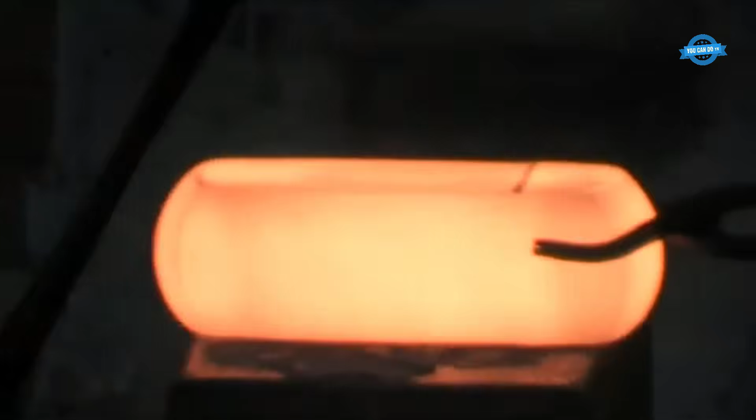One of the standout features of this hammer is its air or water cooling system. The cooling system helps maintain the hammer's efficiency and prolong its lifespan. It prevents overheating, ensuring consistent performance even during prolonged use. This cooling system also contributes to the hammer's high blow rate, allowing for rapid and efficient forging of materials.

The Hydra-Pneumatic forging hammer is known for its superior control. Operators can precisely adjust the force and speed of each blow, making it suitable for a wide range of forging applications. This level of control results in high-quality finished products with minimal waste and rework.

One of the most significant advantages of this hammer is its energy efficiency. Unlike traditional forging hammers that rely on compressed air, the Hydra-Pneumatic forging hammer offers a groundbreaking approach to energy consumption that sets it apart as a remarkable advancement in the field of metalworking.

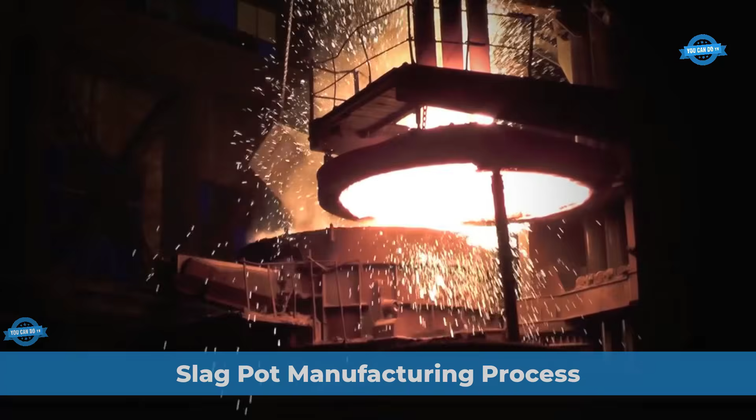At Great Wall Steel Casting, the manufacturing process of slag pots involves several key steps, with most operations taking place in-house at their foundry plant. Here is an overview of the process.

Molding. Sand molds are used to shape the slag pot. The exact dimensions and design are based on engineering patterns. Trunnions. If required, trunnions are cast into the slag pot. These trunnions are typically made from S355 J2G3 steel to meet DIN EN 10025-2 standards.

Melting. The melting process occurs in the oxygen steel plant. The ladle has a capacity that allows for a continuous bottom pouring process, which is continuously monitored for speed and quality. Metal analysis is performed using a computer-linked spectrograph to ensure the right composition.

Heat treatment. The slag pot undergoes heat treatment, which includes heating to a temperature above AC3, austenitizing, at around 915 degrees Celsius. Controlled cooling in a furnace is then followed by an intermediate holding phase at 600 to 630 degrees Celsius. The cooling process continues in the furnace until the temperature reaches 300 degrees Celsius.

Fettling and dressing. The inner surface of the slag pot is carefully processed to remove surface discontinuities that could cause slag to stick. Additionally, the castings are descaled using shot blasting. The exterior of the slag pot is coated to protect it during transportation.

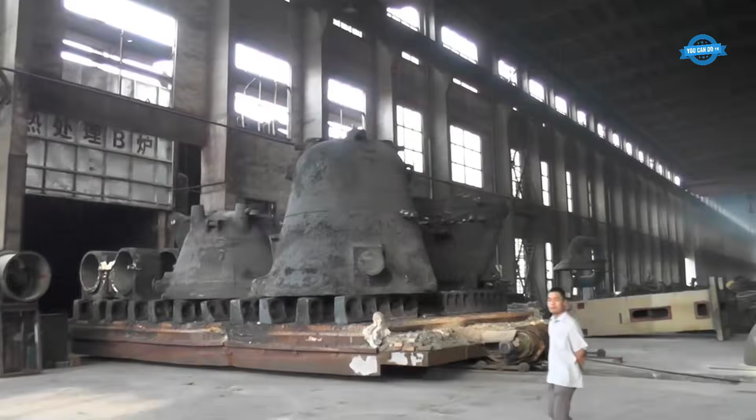The production of the reactor plant for the newest nuclear-powered icebreaker. The process begins with the casting of blanks, which are the starting materials for various components of the reactor plant. These blanks weigh a total of 547 tons and are subjected to extreme heat, reaching temperatures of up to 1200 degrees Celsius. This high-temperature forging is essential to create the strong and durable components required for the icebreaker's reactor.

Machining of flange holes. One of the most challenging tasks is machining the flange holes for the steam generator cassettes. It takes 39 hours to machine just one hole, involving 38 meticulous steps and specially developed tools and processes to achieve the required accuracy. Corrosion-resistant surfacing.

A total of 10 tons of corrosion-resistant tape is applied to safeguard the metal surfaces. This surfacing process spans over 8 months and adds an additional layer of protection to the reactor components, ensuring their longevity.

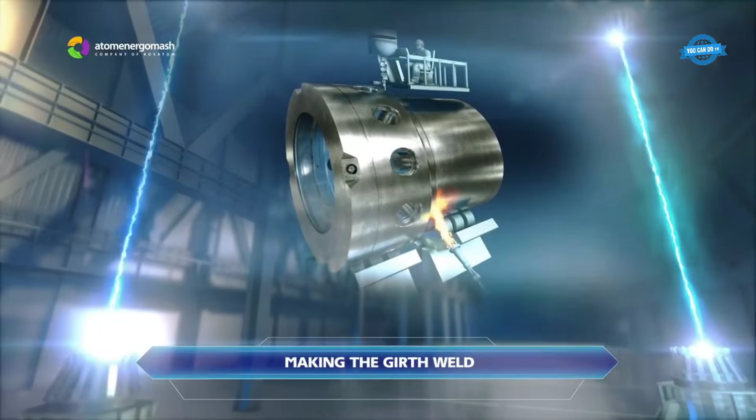Making the girth weld. The girth weld is a critical component that holds the reactor vessel together. It requires 4 days of continuous welding, using an impressive 600 kilograms of molten metal wire. The thickness of the weld measures 150 millimeters.

Welding the nozzles and heat treatment. To ensure their durability and integrity, they undergo a meticulous welding process. The metal is preheated to 200 degrees Celsius before welding to prevent cracks in the welded joints. This process takes 3 days to complete.

Closing weld. Joining the semi-vessels into a single, cohesive unit is a critical step in assembling the reactor plant. This process requires 600 kilograms of molten metal wire and results in a weld with a thickness of 150 millimeters.

Welding the hydraulic chambers. Each hydraulic chamber, with a substantial weight of 4,500 kilograms, undergoes a 20-day welding process. Welds with a thickness of 82 millimeters are meticulously crafted. These hydraulic chambers play a vital role in the operation and control of the reactor plant.

Fabrication of in-vessel internals and reactor closure head. The intricate components inside the reactor vessel, such as internals and the reactor closure head, are fabricated with precision. These components are designed to ensure the safe and efficient operation of the nuclear reactor within the icebreaker.

The production of the reactor plant for the newest nuclear-powered icebreaker is a testament to the expertise, dedication, and innovation of the team at Atomenergomash. This nuclear heart powers the icebreaker through the harshest of Arctic conditions, allowing it to navigate frozen waters and maintain a strong presence in this challenging environment.